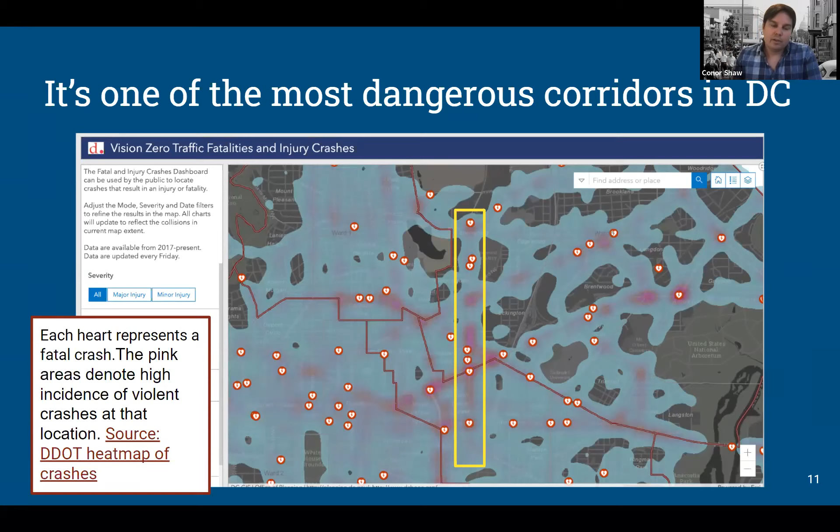Each one of those hearts represents a person whose life was cut short, and a family that lost them, and a community that lost them. We want to acknowledge the devastating impact that can have on families and communities. Sadly, this doesn't relate directly to North Capitol Street, but two days ago we lost a five-year-old, Allison Hart, to traffic violence in Brookland. We're thinking of her and her family this evening as well.

I want to focus a little bit on where these crashes are happening. If you look closer at that heat map, you'll see that a lot of the dangerous crashes on the north side of the corridor are happening at either end of the underpass. That matches the views of that witness, that people are racing, and a lot of the dangers are coming from people racing through these underpasses. On the right of the screen, you'll see the lower half of the corridor, and there also we see crashes concentrated above that south underpass, as well as at some very big intersections at New York Avenue and also at H Street.

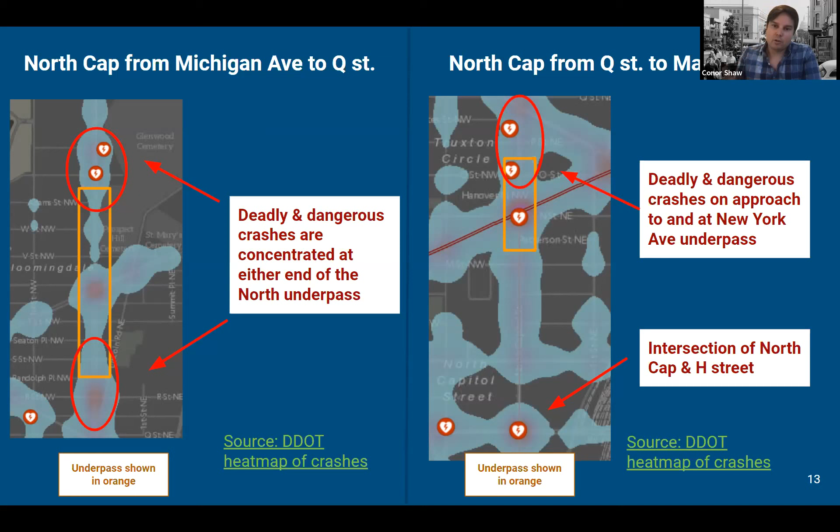We think this traffic violence is unacceptable, and making the corridor safer for everybody has to be our top priority.

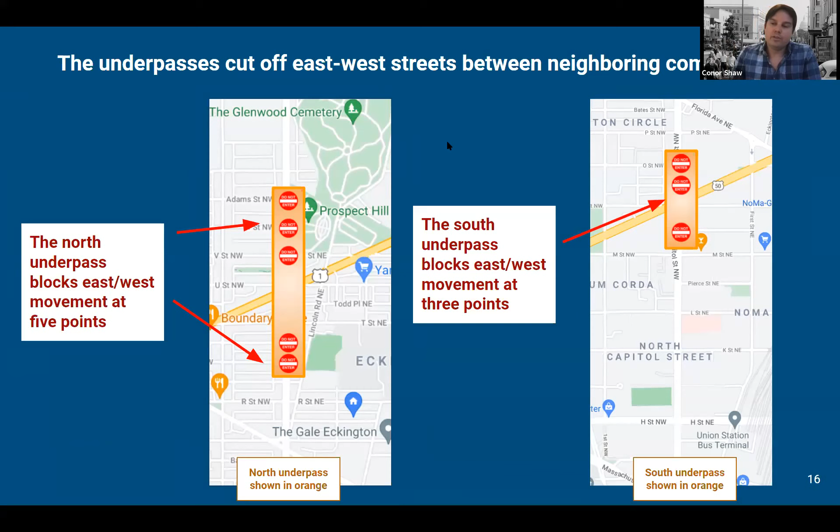Moving along, we also want to talk about how North Capitol Street divides communities. The underpasses cut off a lot of local roads that go east and west - the north underpass at five different points and the south underpass at three different points. This is what they look like at street level. We're all familiar with this. Instead of being able to cross directly, a pedestrian will have to go down the block and around. The limited number of these at-grade four-way intersections creates a lot of choke points in the corridor, funneling pedestrians, cars, and cyclists into very constrained, dangerous spaces.

We also want to talk about how the corridor is inequitable. North Capitol Street puts the needs of drivers over everyone else, even though only 31% of neighboring residents drive to work. The vast majority, about 61%, rely on other means, whether it's transit, walking, or biking. At the same time, bus service on North Capitol Street is failing. 30% of Route 80 buses are late, and the average delay of that bus is 14 minutes. The speed that buses travel along this corridor is slower than a scooter or a bicycle travels.

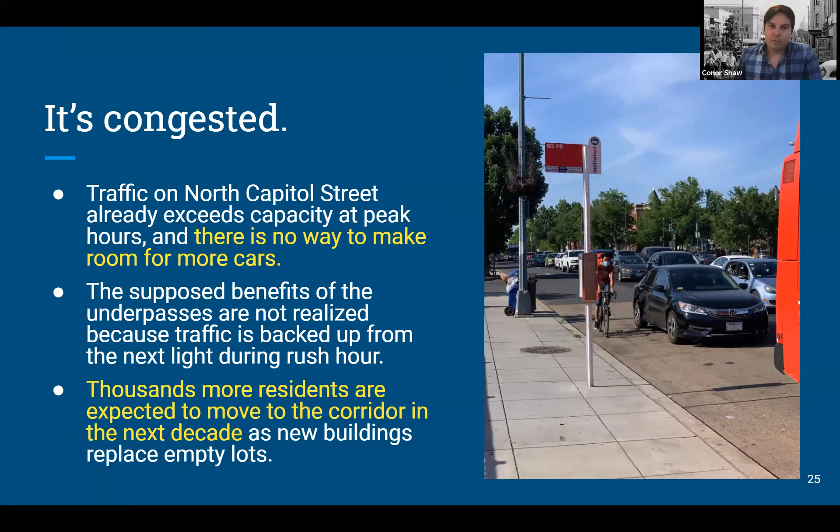We're expecting thousands more residents to move to the corridor in the next decade as more buildings come online. It's not just about congestion, though, it's about pollution. And that pollution harms residents along the corridor, especially those who live within 500 meters of North Capitol Street.

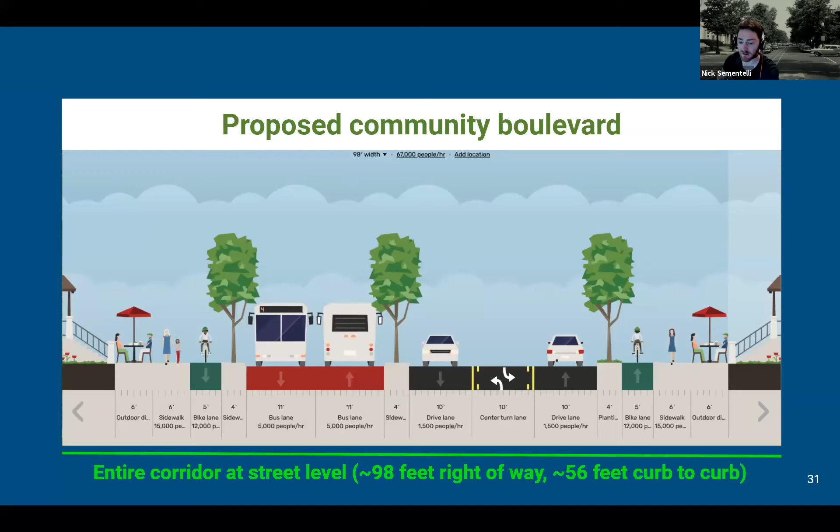The main distinction here is that to slow traffic speeds and reduce car trips on this corridor, it would require taking some drive lanes out of the picture and repurposing that space for the other modes. So we've got protected bike lanes on either side, a bus lane in a transit corridor format, and expanded sidewalk space as well. You can see the breakout here along those things. We're going to talk a bit about each of these elements and how they help.

As Conor talked about, this is really about math and geometry and efficiency. The current status of the road is only able to move so many people, and we have a lot more coming. So our only options are either to watch it get worse and worse, or to change the way we move people around. We think building the infrastructure now for the future, creating the type of street that will make it easy to use these other modes, is the key.

We also think traffic calming will be gained, as Conor said, by restoring those four-way intersections. As we talked about, the underpasses are a place where people really pick up speed, both going down and coming up. By creating much less opportunity for them to gain momentum and speed, having to interface with stop signs and lights at a regular procession, that's one of the ways you can reduce some of the most dangerous speeding behavior we see.

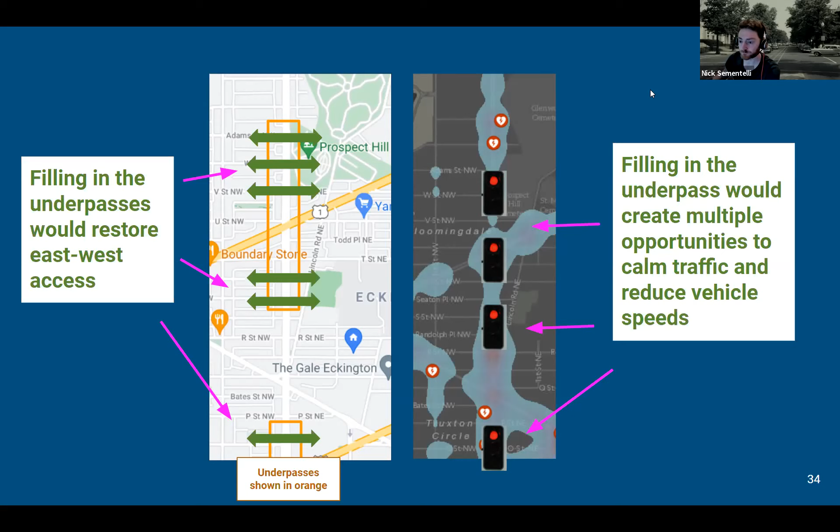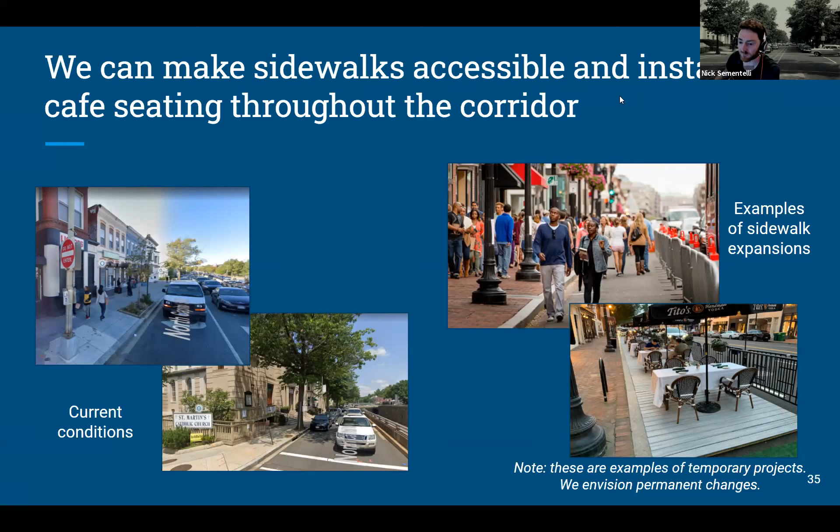We think that North Capitol businesses deserve the same kind of opportunities to really create livable spaces that people want to visit, instead of the kind of crowded right-next-to-a-highway space that we have now.

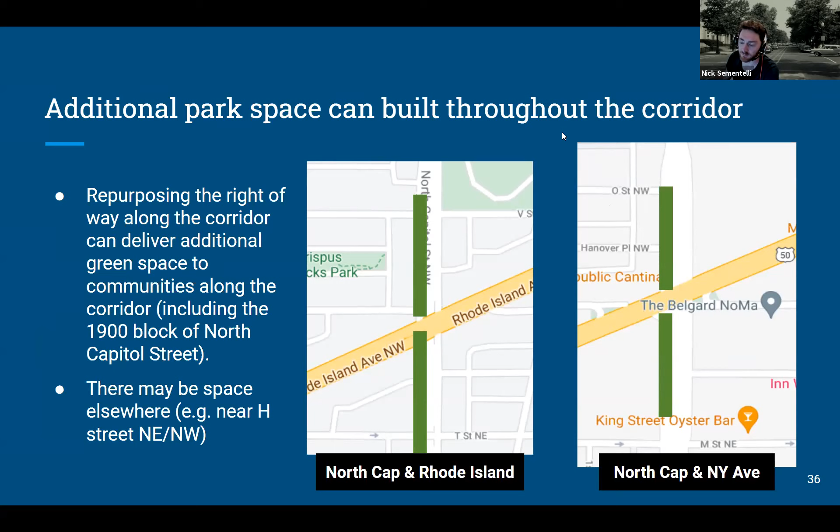The other thing that we can do with that space, particularly in the non-commercial parts, is turn it into more park space spread throughout the corridor. So you can have a lot more green space for people to enjoy as part of their daily lives and walking. And that can be on the north side, even in the areas we're talking about where the underpasses are currently, and on the south side as well, where we don't currently have as much park space or green space, really anywhere, compared to the north side in particular.

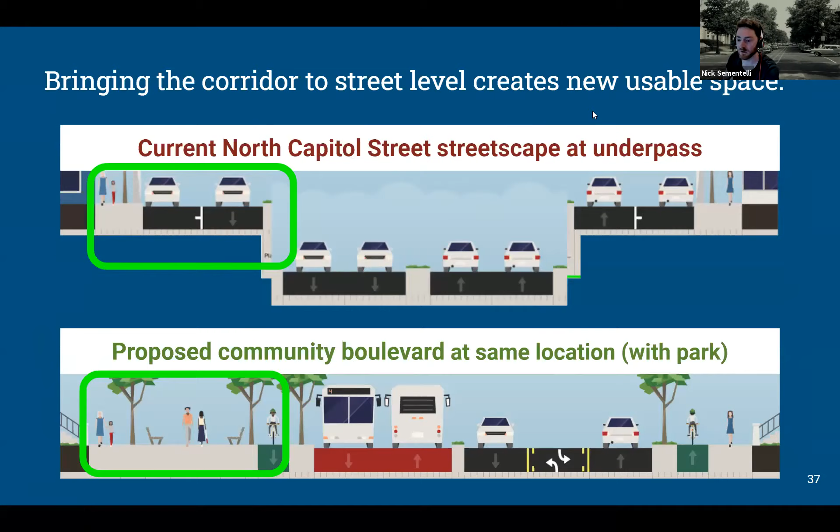The other thing that's useful about the solution is that it's really modular, as I said. When we're talking about redistributing space, we can make some choices. We think that the community really should be engaged in this process of what they want to see with that space and what the priorities are.

So, for instance, you could go even wider on your sidewalk spaces if bike lanes aren't a great fit for this corridor. And if that fourth traffic lane really makes a big difference, you could also add that back in and keep some of the other prominent things like the bus lane. So there are opportunities to work through this, and part of what we're hoping the DDOT planning process will be is really hearing from the community about which parts of this they're most excited about, to help suit everyone's needs.

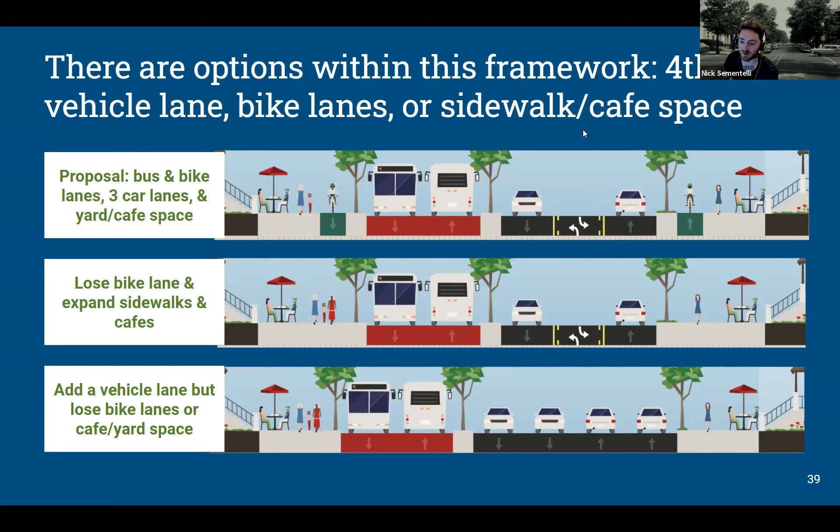So this vision is consistent with what DDOT's doing in other places in the city too. And we think it's time that Ward 5 gets some of that.

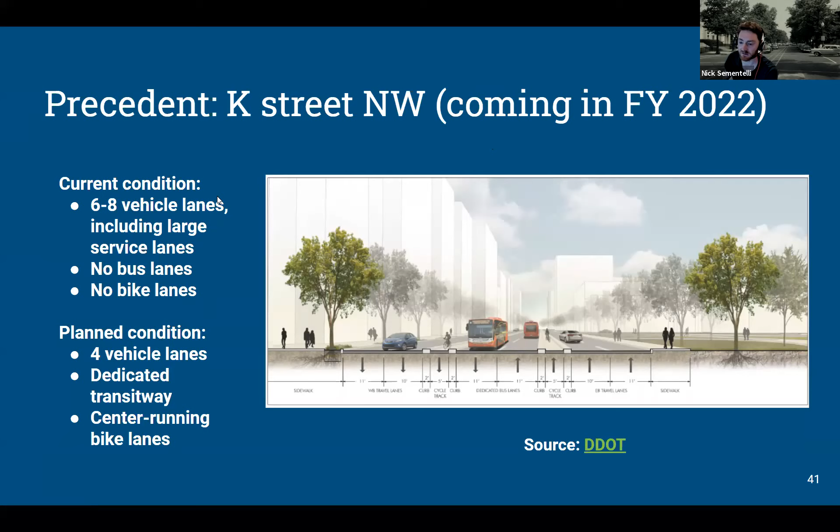So one precedent is down on K Street Northwest through the downtown area. What's currently 6 to 8 vehicle lanes with those very large service lanes, you might know if you've been there, is being turned into 4 vehicle lanes with a dedicated transit way and center-running bike lanes. That's a very big project that's been on the city's priority list for a long time, and it's a good example of reducing some of those existing drive lanes to give other modes some space.

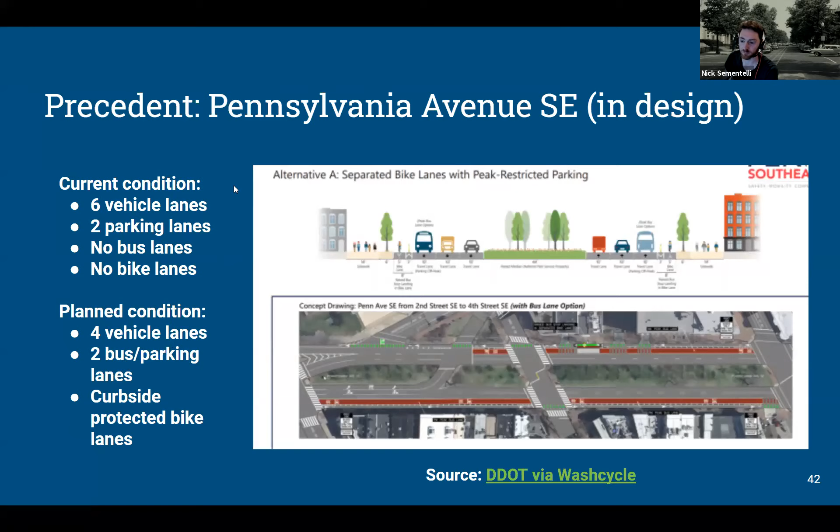Similarly, over in Pennsylvania Avenue Southeast, the Capitol Hill neighborhood, 6 vehicle lanes with 2 parking lanes are being shifted down to 4 vehicle lanes with 2 bus/parking lanes, depending on time of day, and those also have curbside protected lanes. So a similar reduction happening there for safety and livability.

So obviously we're here with two different presentations, and we think that we agree on so much, really. We are here because we're united in an understanding of some of the problems here. But Connor and I have a point of divergence where we think our solution addresses things a little bit better.

So I'm just going to lay out what we see those are, but in a friendly way to our friends over here from the Deckover community, who we're really happy are here with us today, and have some wonderful ideas that we're happy you guys are going to get to see as well.

We think the Deckover really includes a great vision to add a park to this area, but it's a little too narrow for the corridor, and it doesn't put safety at the top of what we're trying to solve, and would potentially limit our options for the future.

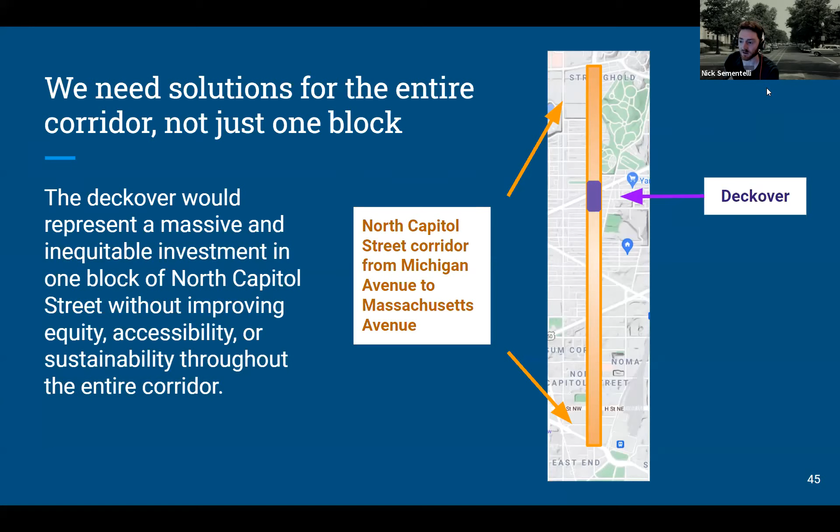In terms of the scope of the corridor, we think we're really talking about this Massachusetts to Michigan area, where, as you saw on Connor's map, the crashes are happening, where the deaths are happening, and that the Deckover helps address some blocks of that in some ways. But it doesn't really speak much to the rest of the corridor in as substantial a way as we think we can. We think it also locks in some of those unsafe conditions.

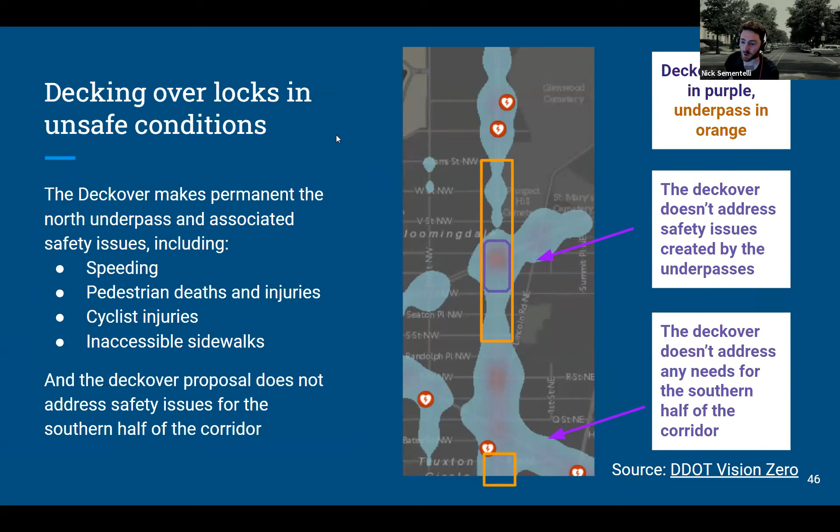We talked about why we think the underpasses really exacerbate the speeding and danger of the block, decking over on the one and leaving the other completely as is. We think this locks those conditions in, in a way where we really could be thinking bigger. We also think park space is an amazing thing we should be adding more of.

But we do think that this block of the whole corridor is not quite the place most in need of it. We know Harry Thomas Rec and Crispus Attucks are great parks. They certainly don't meet every need of everyone in the community - there's always room for more - but we think there's opportunity to look a little elsewhere in the corridor where we could bring some park space and make it even more distributed across the corridor.

The other reason we're pushing for a little bit more is that these really are moments that only come around once in a generation. The level of budget, attention, and political will - it's rare that one street's going to get changes twice in a row. So as long as we're here at the outset, it's really incumbent on us to ask for the thing that will make the biggest difference and fix all the problems together.

So our idea here is really to merge the best of both worlds. We think we can add a signature park that is very much in line with the space the Deckover is offering to bring to the community, into the community boulevard vision. And we actually think there's an amazing place for it that's already been identified in the past.

This is Lincoln Road looking southbound, Lincoln and North Cap, where those two veer off and connect together at Florida. There's already two very small pocket parks here - think of this as the place where the flea market often puts some of their wares. This space was identified in the 2013 Mid City East Livability Study by DDOT, shown as this blue space on the right, which they already recommended closing off for safety reasons - this cut-through lane, basically.

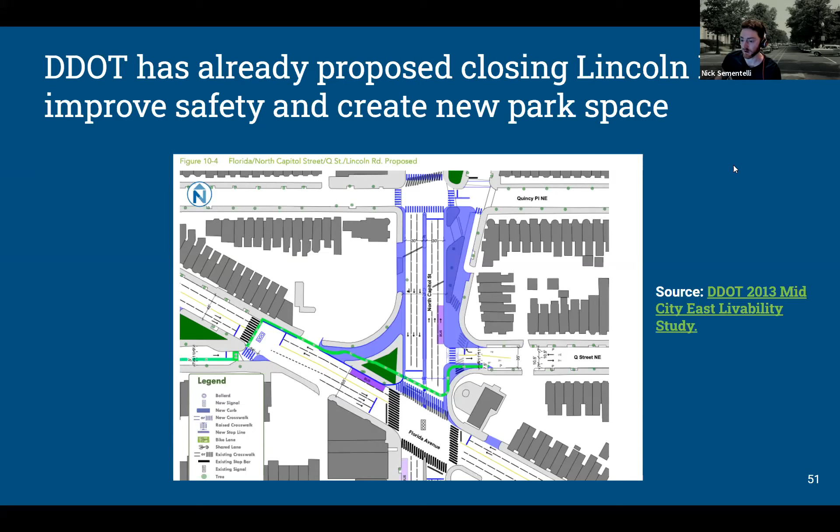In fact, more space than even DDOT identified in 2013. What we actually have here in terms of public right-of-way is a significant amount of space, because you'll notice this semicircular shape here at the right end - we've turned the map 90 degrees here. This is what used to be the old Truxton Circle, where the neighborhood gets its name from. That right-of-way actually covers all the way through the Q Street intersection, so we've got this long, semi-narrow, but actually quite wide at the bottom space that we think can be an equivalent opportunity to add a great park.

This is just some of the ideas that we've talked about in terms of segmenting the space, the same way the Deckover has done a much better job thinking through the vision of the park itself. This is a very early idea on that, and we also think there's some options for connectivity here.

The blue represents the opportunity to do something similar to what the Deckover offers, called a woonerf, where the pedestrian level, the sidewalk, and the street are basically at the same level, usually done with the same material, often brick pavers. It's the kind of thing you've seen down at the Southwest waterfront. It really communicates to drivers that this is a different kind of space, a pedestrian-first space, so they need to be slower and on unfamiliar territory.

We think we could offer similar connectivity here through Quincy and up to R, and through the alley there. But also, if the community felt really strongly, this could be entirely parked with traffic routed out the other side. That's something the community would want to talk a lot about in a proposal like this.

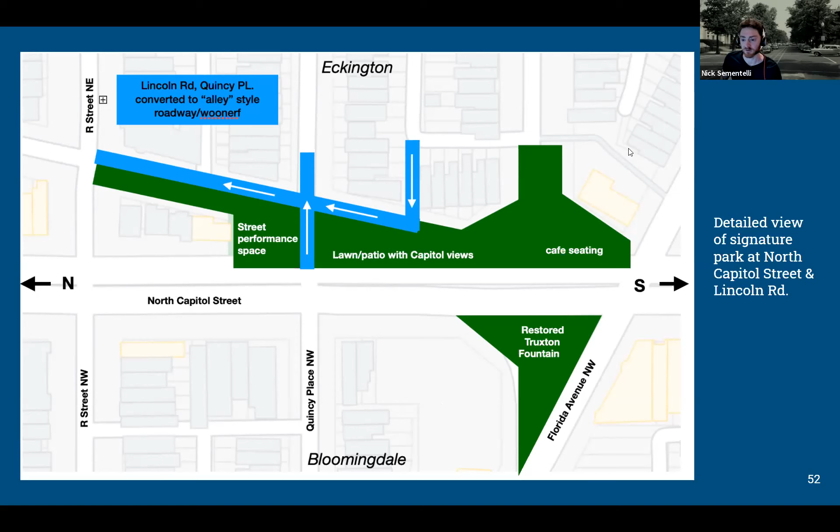In terms of total size, we think this is a real opportunity to add a very similar amount of space as what the Deckover is proposing. By an unofficial measurement, using the same scale on these maps and tools, we think we're talking in the same ballpark of 30 to 40,000 square feet for each case. So we see this as a great way to essentially add that space either way, without locking in the underpasses.

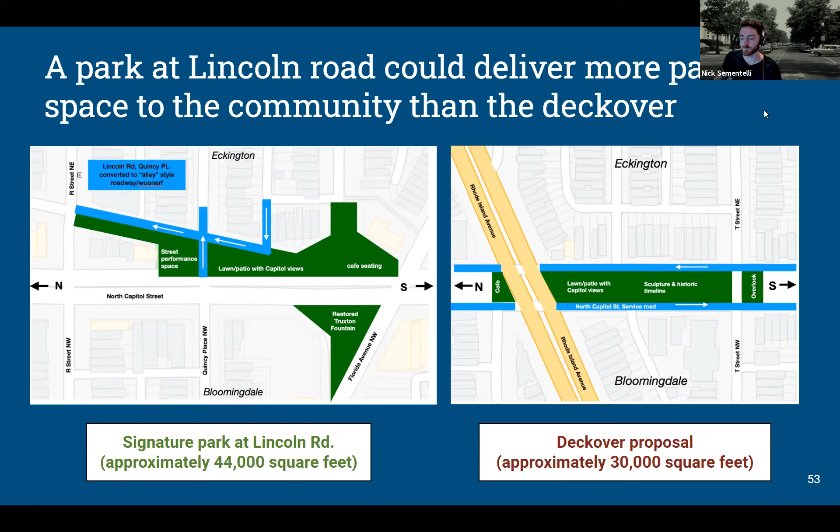The other thing you might have noticed in the slide is a mention of restoring the Truxton Circle fountain. This is something the community lost when Truxton Circle was bulldozed away. Apparently the fountain has been lying rotting away in a national park in Maryland, so it's still there—I don't know what condition it's in. This is a bit of an optimistic idea.

But I've been inspired a lot by what the Deckover folks have brought around using the park to tell the story of the neighborhoods and some of that history. I think this could be incorporated in a way that might be really special, marking this space and restoring something that was lost from the community.

So to summarize, we think Community Boulevard is the right long-term vision here for North Capitol Street. This will make the corridor safer, help reconnect the neighborhoods, improve transportation equity and sustainability, and help us add a lot more park space throughout the corridor, including that signature park, hopefully at that location. In terms of logistics, we know this is a big project and a big vision.

There's a lot of funding options that will all be part of the conversation. The first is that DC's capital budget regularly funds projects like this—the K Street project I mentioned had $116 million in the budget, and the Douglass Bridge, just completed by DDOT and opened last weekend, was a $400 million project. So the district has made big capital projects for streetscape redesign a priority in other parts of the city, and we think North Capitol is a particularly needing and deserving one.

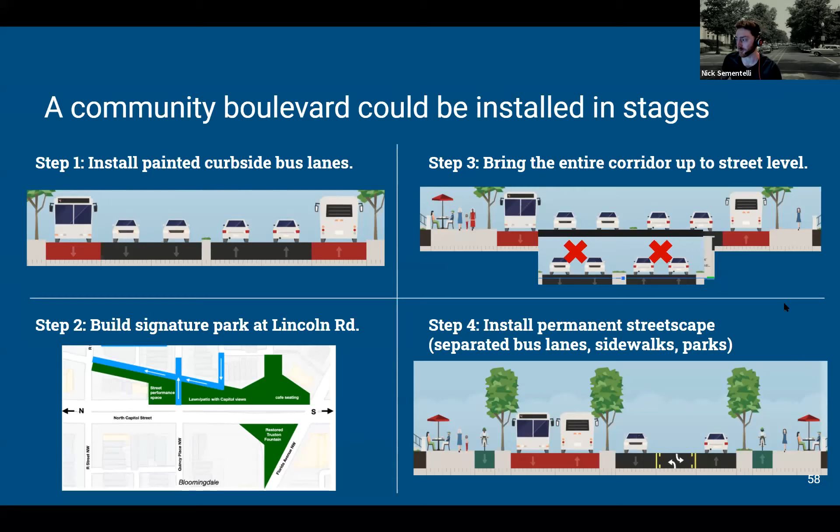Building that signature park certainly isn't dependent upon the entire thing happening right away, so there's opportunity for that to be sequenced in. And then obviously bringing the road to grade would probably be one of the larger portions of the construction, followed by installing the full streetscape redesign. We're not DDOT, we're not the planners, but our expectation is there would be some level of staging to this.

So our pitch for the proposal, going through everything we talked about, is why we think the compromise really maxes out all of the things we're discussing here, and is something we hope DDOT will be interested in engaging with. We hope you'll bring great questions and ideas to make it even better.

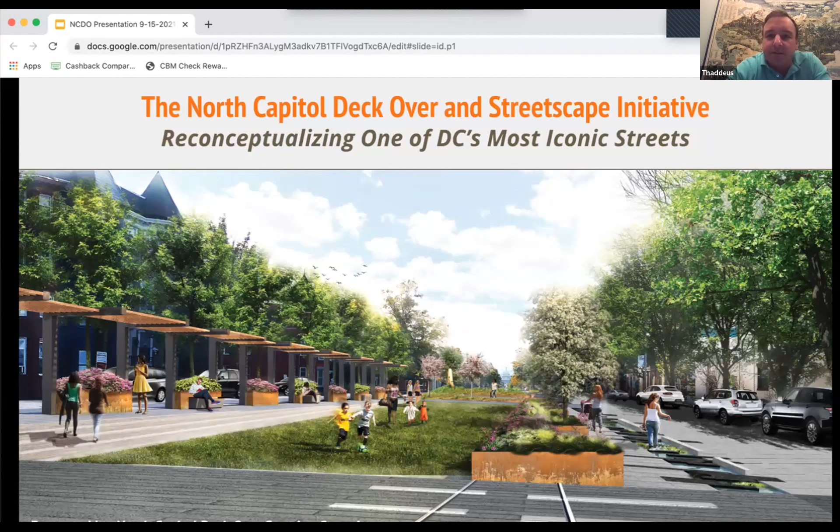Thank you to the Eckington Civic Association, as well as to Nick Sementelli and Conor Shaw, for giving us this opportunity to speak on behalf of the North Capitol Deckover and Streetscape Initiative. My name is Thaddeus Thaler, and I'm a resident of Bloomingdale—I actually live right on North Capitol, overlooking the underpass. Joining me on our panel is Mark Galvan, a resident of Eckington and vice president of the Eckington Parks and Arts Association, as well as Bloomingdale Civic Association president Teri Janine Quinn, and ANC 5E representative Bertha Holliday.

What we want to talk about here today is the alternative vision from what was just presented a moment ago, and we like to think it's the one that's been around a little bit longer. But to start off, the approach that we have for the North Capitol Deckover to create a park over the Rhode Island underpass, I know my colleagues would be appreciative if we talked a little bit about the history in a similar way that was just described earlier.

I think a good way to demonstrate that is through a video here that was presented by Vox a couple of years ago to describe the history of highways in the nation. In particular, I would like you to listen to two mentions of Washington, D.C. So without further ado, I will get this video started.

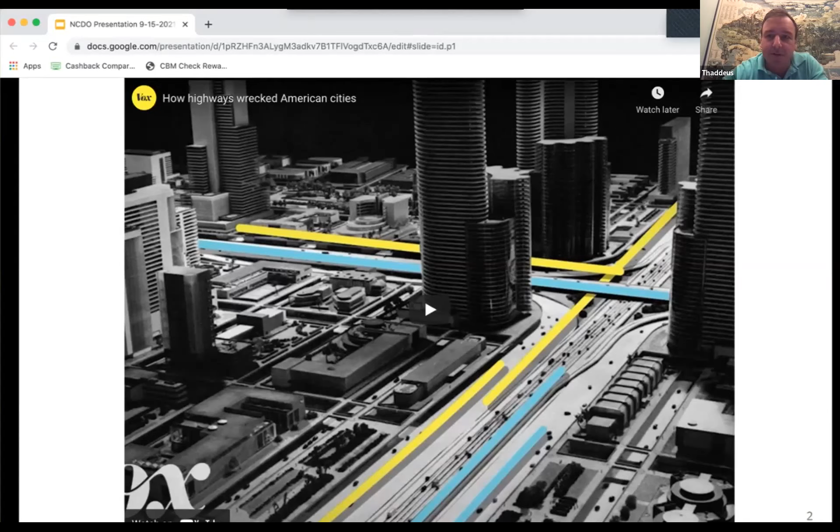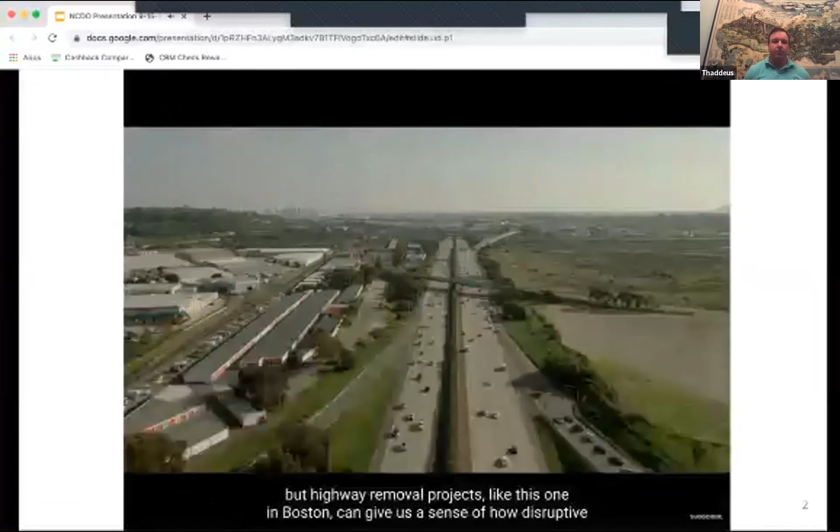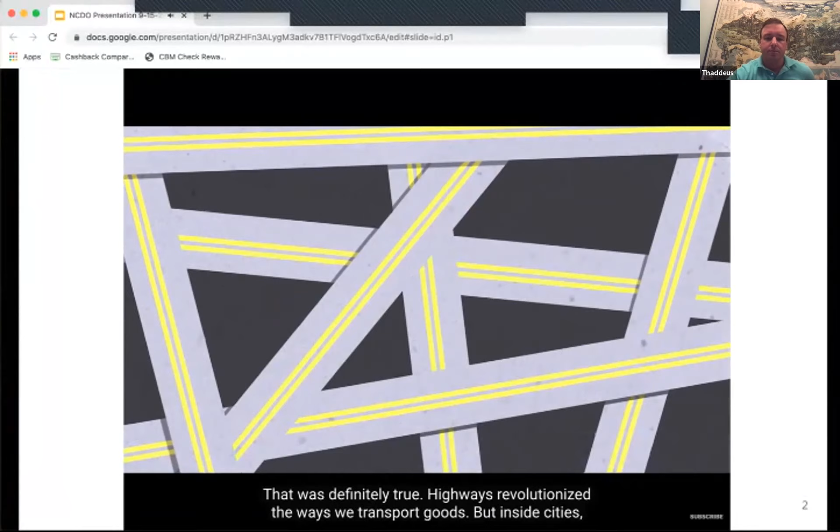It's hard to picture American cities without the highways running through their core. But highway removal projects like this one in Boston can give us a sense of how disruptive it was when the U.S. built huge highways through the cities after World War II. These new highways will have a far-reaching economic impact on the entire nation. That was definitely true. Highways revolutionized the way we transport goods. But inside cities, they demolished and isolated entire neighborhoods. They gave wealthy taxpayers a way out of the city and gave air pollution and traffic noise a way in. And they redesigned urban life around the car. Now 85% of Americans drive to work every day.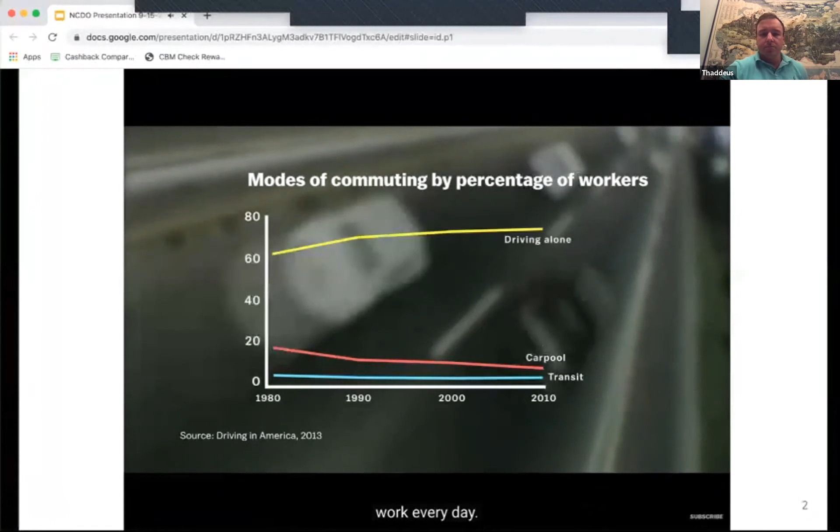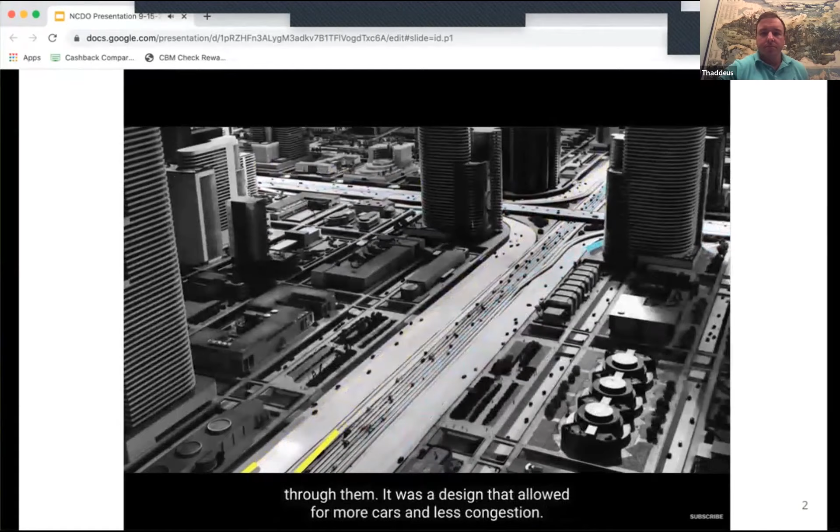So why did American cities agree to build highways that were bad for cities? It's a really interesting question, and part of it actually goes all the way back to the 1930s, when a group of auto interests, such as General Motors, AAA, formed something called the National Highway Users Conference. They began lobbying for taxes that would help fund highway construction. General Motors started to design what a new highway system could look like, and they displayed that vision at the 1939 World's Fair with Futurama, an exhibit featuring expressways that not only connected cities, but ran right through them. It was a design that allowed for more cars and less congestion. By 1955, the Department of Commerce echoed GM's vision with something called the Yellow Book. It laid out all the routes that interstates would take throughout the country under Eisenhower's Federal Highway Act of 1956, which funded the national highway system.

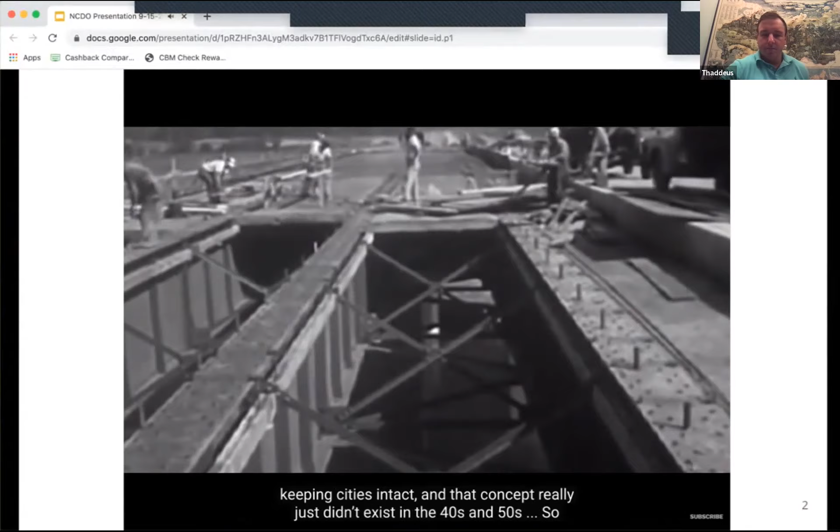A lot of it's logical. It's connecting most of the U.S.'s major cities. But the really interesting thing is you also have highways slicing right through the downtowns of many of these cities. Pretty much every major city in the country, New York, D.C., San Francisco, Philadelphia, you have major highways cutting through neighborhoods, requiring the demolition of lots of housing and other sorts of buildings. That's largely because some of the key contributors to the plan were auto industry members, developers, but no urban planners. And that's because the profession barely even existed at the time. Nowadays, there's a value placed on preserving neighborhoods, on keeping cities intact, and that concept just really didn't even exist in the 40s and 50s. When people were talking about connecting the country with highways, it seemed pretty natural just to drive highways through the center of cities as well.

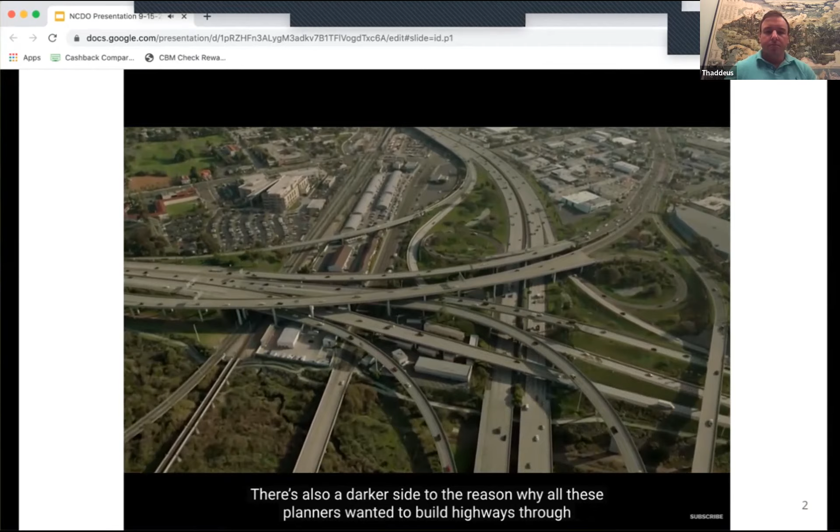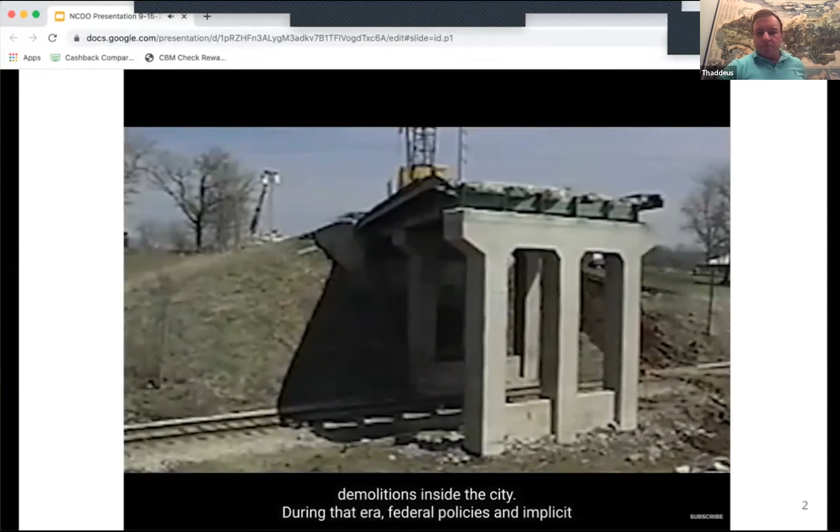Local municipalities were particularly eager to build highways under this plan because 90% of funding came from the federal government and the other 10% from states. There's also a darker side to the reason why all these planners wanted to build highways through downtowns and urban neighborhoods. Highways not only paved the way for more and more white people to move into homogeneous suburbs, they also provided cover for targeted demolitions inside the city. During that era, federal policies and implicit priorities of planners dictated that vibrant, dense downtown neighborhoods filled mostly with African-American residents, instead of being preserved under the plan, were slated as targets for removal. They were considered blight, and an easy way of getting rid of that blight was by demolishing them and paving a highway through it. Neighborhoods and streetcars were pushed aside to make way for the automobile.

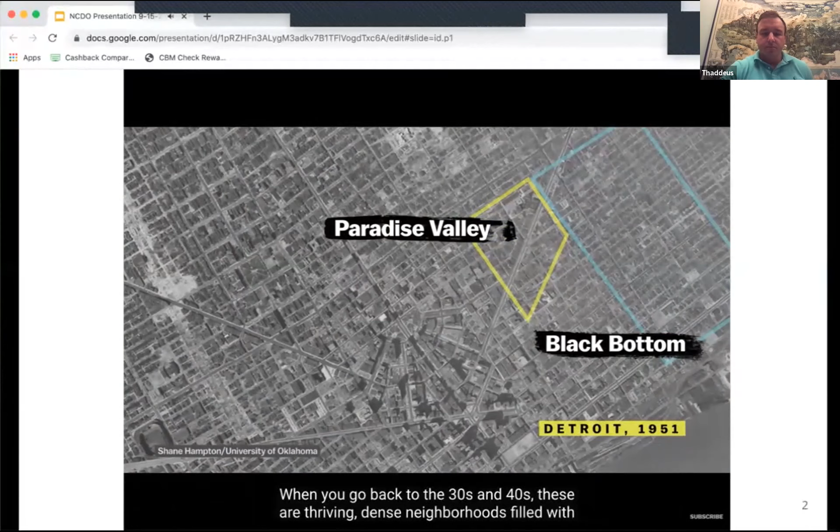Look at the neighborhoods of Black Bottom and Paradise Valley in Detroit. When you go back to the 30s and 40s, these are thriving, dense neighborhoods filled with hundreds of thousands of residents, of businesses. And if you go back today, they're mostly just empty grass plots. This wasn't just a historical accident. It became a pattern in cities across the country.

Poor and minority residents were displaced to make way for highways, and white residents used those highways to commute into the city for jobs and back home at night. The only exception is where highways were slated to go through wealthy neighborhoods—there were actually proposals to put a highway through Northwest DC and through Greenwich Village in Manhattan, but you can guess what happened there. Anywhere residents had the means to organize and protest, they were often able to stop the highways. Where residents didn't have that political capital, their neighborhoods ended up demolished, and they're highways today.

So to that vein, we wanted to talk about the history of North Capitol Street. In Georgetown, the Northwest reference made in the video, it didn't happen down Wisconsin Avenue—no, it happened on North Capitol Street. The expansion and widening of North Capitol Street finished in 1963, just a few years after the National Highway Act was passed in 1956. This was indicative of a gradual eastward movement shifting the dividing line between white and Black neighborhoods. It originally was west of First Street, moved eastward to First, and finally settled on North Capitol Street.

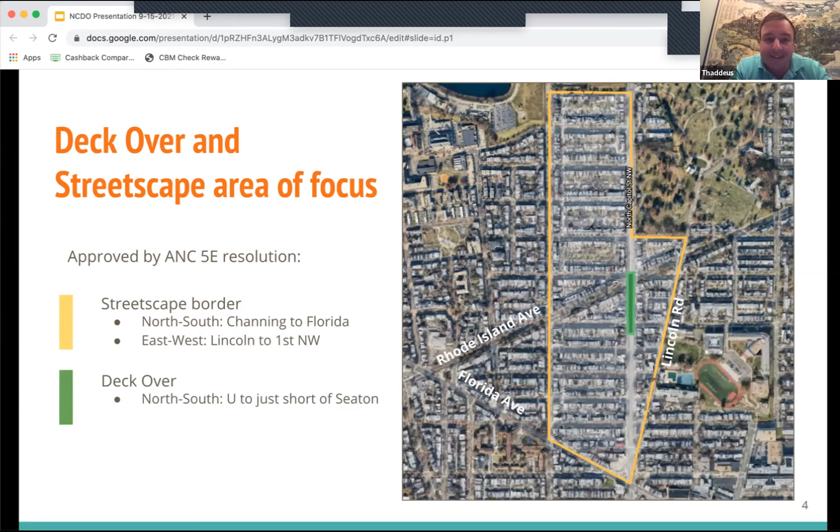The distinguishing factor between the two competing ideas—bringing North Capitol Street to grade versus providing a Deck Over—is the question of reuniting communities versus purely focusing on transit, which by and large comes from out of state, from Maryland drivers. If you ever stand over the underpass, you'll see the number of Maryland plates coming through. The importance of reconnecting communities divided by this national highway, to rectify infrastructure wrongs and create a safe place for people to cross, is how we've envisioned the Deck Over space and park overall.

On top of that, you have aspects of pollution which would be covered up. You would have noise covered up, reduced, and essentially eliminated by capping over this existing space.

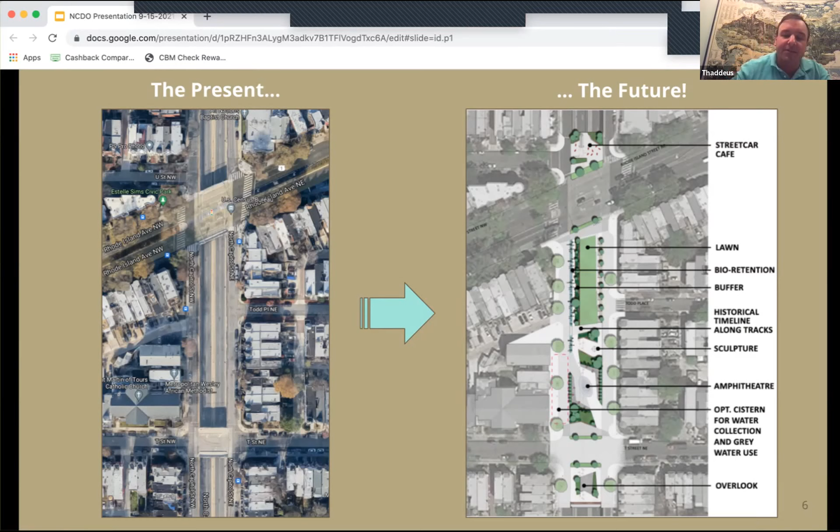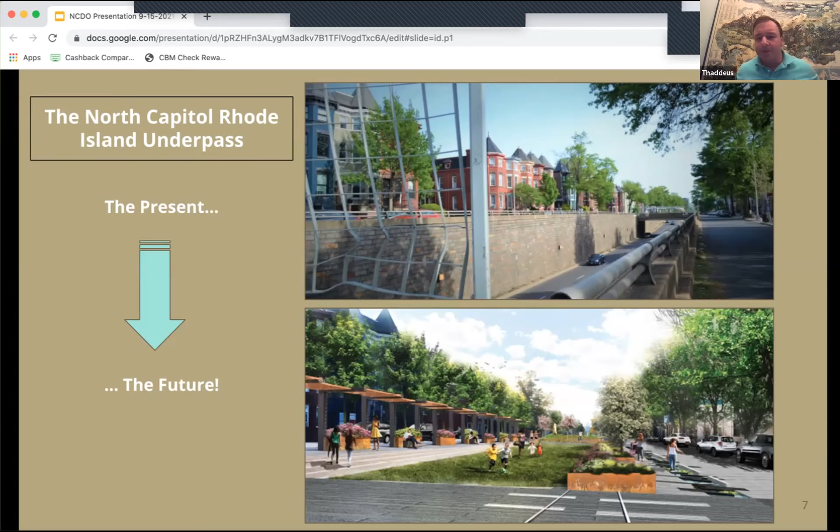Here's another viewpoint looking south from Rhode Island on the northwest side of North Capitol Street at the top, versus what could be—covering it over, providing lots of shade, additional trees, an area down the center for children to play, and curbless streets off to the side that run along St. Martin's Church. We've really upped our civic engagement this year in the post-pandemic era.

When you talk about traffic coming through, this is my every morning when I look out my window. This is what I see, this is what I hear, this is what I smell. And not only myself, but another North Capitol Deckover Steering Committee member, Sandrine Bukersh, who lives in Eckington on that side of North Capitol.

So this is what would be covered up essentially. Imagine not having that noise, not having that pollution emanating up, as opposed to having it at grade level, basically bringing all this right up to surface level.

This gives you another view of what could be. The way that this had been presented to us was the possibility of having several different areas. You could have a rest area, play area, gather area, vista area. It's very typical of urban planning to lay out parks in this manner.

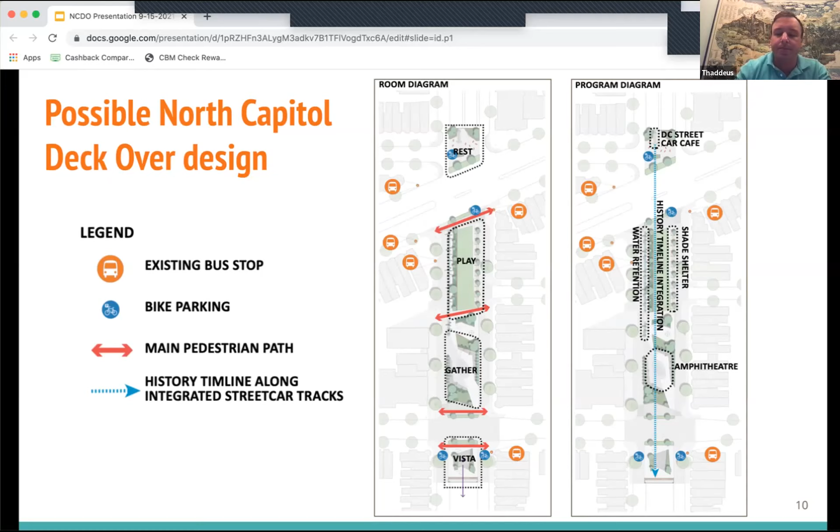When we talk about safety, something important to consider is a study done in 2017 by public health specialists from Columbia University and the French School of Public Health, published in the American Journal of Public Health. They described, using scientific Monte Carlo economic simulations, how savings were realized in 84% of those simulations.

Ultimately, in a rapidly urbanizing world, reclaiming green space through deck parks can bring health benefits alongside economic savings over the long term. They produce exceptional value when implemented over below-grade infrastructure.

So when you're making assertions about things like this, it's important to look at the research that's been done. Sure, you can make assertions, but what is the science to back it up? What have the actual subject matter experts said? None of us on the North Capitol Deckover Committee assume that we ourselves are urban planners or transportation safety specialists, so that's why we rely on outside sources like this.

For example, when we talk about traffic lights that could occur if you were to bring the underpass back up to grade, as we saw in the previous presentation, it was described that traffic lights are a traffic calming and safety measure, when actually that's not the case.

According to the US Federal Highway Administration, the New York City Department of Transportation, and a professor at the University of Utah—actual authorities on traffic calming—traffic lights and stop signs really aren't designed to be speed control. It's all about traffic flow and efficiency, and actually it ends up being counterproductive. It's more about speed bumps, speed limit signs, and traffic enforcement, because drivers end up accelerating to try to get through the signal before it turns red.

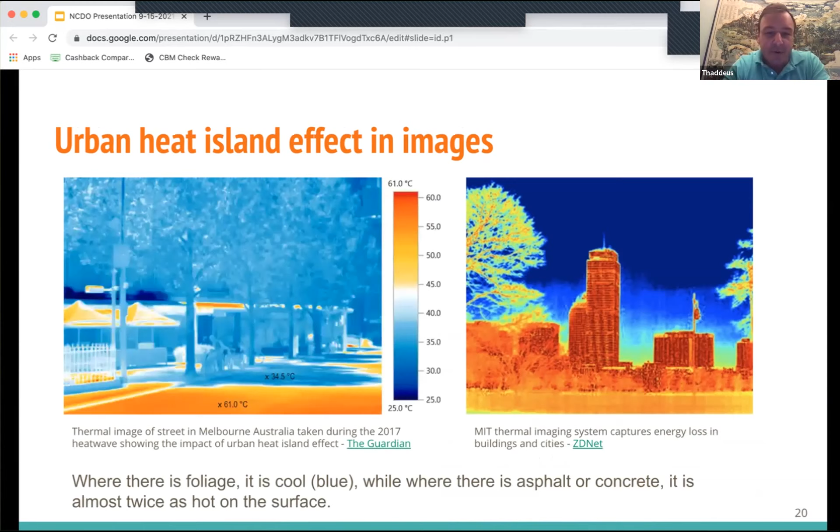You can see this distinction here. When you see the blue, that's where foliage is. Where you see the orange, that's where concrete and asphalt is. So there are a lot of different strategies that can be used to reduce urban heat, rain runoff, promote quality of life, shading, surface water, and cool paving.

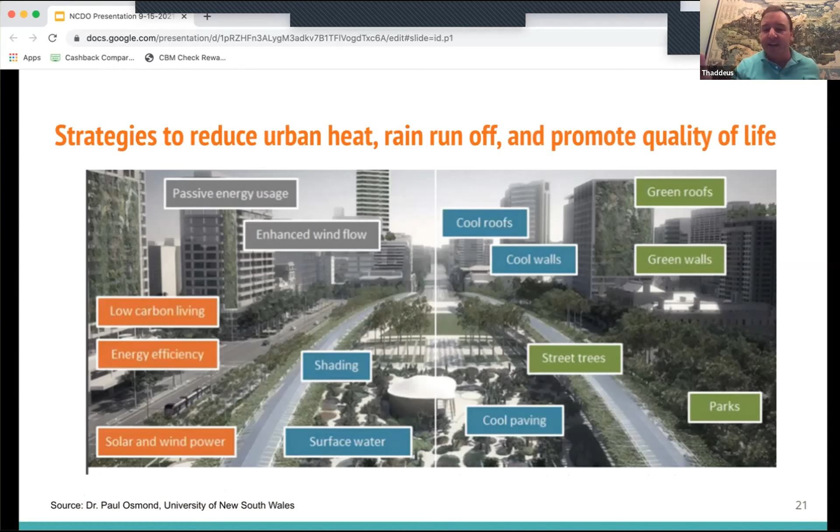And when we think about that, that's exactly what the Deckover would be doing. There are so many opportunities, from bioretention to a cistern for water collection and gray water use. Just a lot of opportunities to go in the direction the world is going, as we recently rejoined the Paris Accords, to improve the environment.

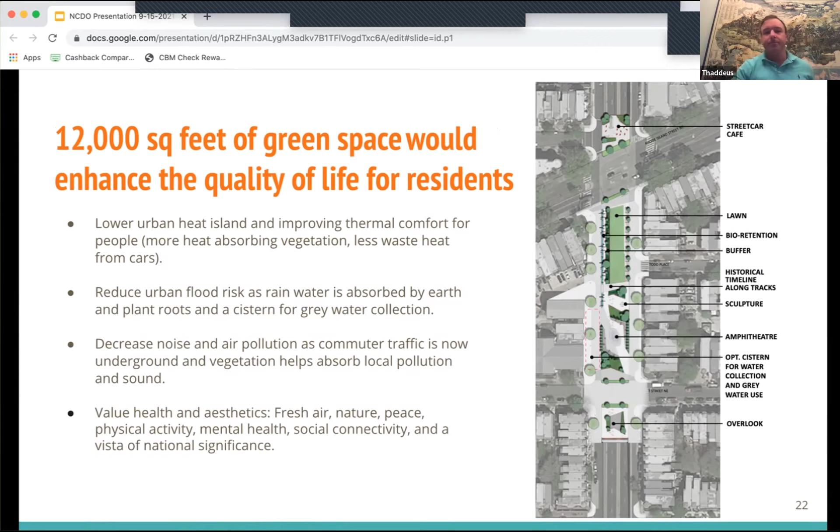And yes, we do concede that there are a number of parks around here, but something that's important is to have this connectivity of connected networks of cool green areas. You could move swiftly from Crispus Attucks to the Deckover, on down the line, Harry Thomas, and all the way down to Tanner Park as well.

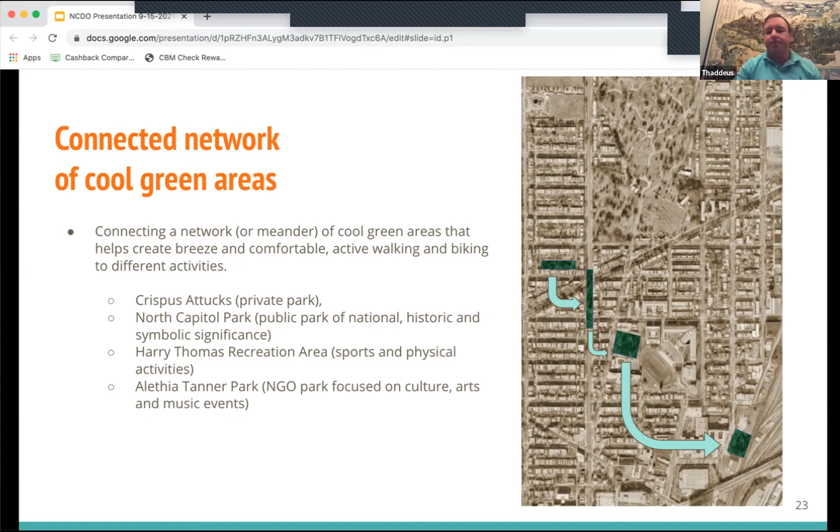And this isn't a flash in the pan idea. This has been around for about 40 years, since the first one was developed in Seattle and in Phoenix, Arizona. The importance of this is that you're able to address urban inequalities and inefficiencies while putting large volumes of highway traffic underground.

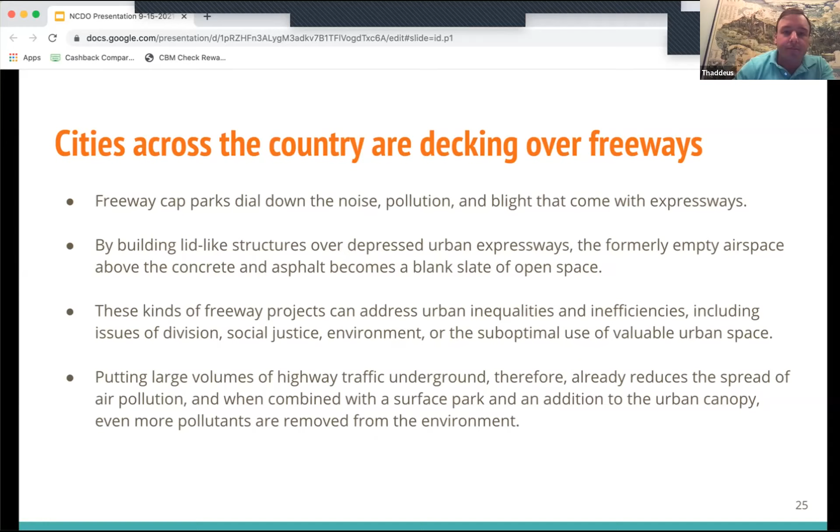As I said, they're happening all over the country. For example, in Tulsa, Oklahoma, state senator Kevin Matthews, who founded and chaired the Tulsa Race Riot Centennial Commission, talks about how a park can draw people, and where people are drawn there in closer proximity to things that will educate them. That harkens to the history component we're talking about with the Deckover.

In North Vancouver, another 2-block long deck over the freeway creates a destination public park, with both the east and west sides connected by a pedestrian overpass. We think this idea of a shared communal space where people can freely walk across, instead of having to walk across 6-8 lanes of traffic, including bike lanes, where you have to wait for a bike to cross, and bus lanes, where you have to wait for a bus to cross.

So how does that work with the actual flow of pedestrians, and the timing and movement when someone is turning onto Seton, turning onto T, et cetera, from a boulevard? What sorts of difficulties arise as you increase intersections, which are prone to accidents?

In Oak Cliff, Texas, the Southern Gateway Deck Park, it makes sense that we're going to get green space where there would otherwise be noise pollution and high-speed traffic, seen very much as a positive.

Even going back to 2008, the city of New York took a look at an inventory of decking opportunities over transportation properties. They found 83 possible areas. Yes, some of them were over train tracks, but a good number were also over highways, for example the BQE, the Brooklyn Queens Expressway. They looked at decking over the below-grade highways to stitch neighborhoods back together and create green infrastructure.

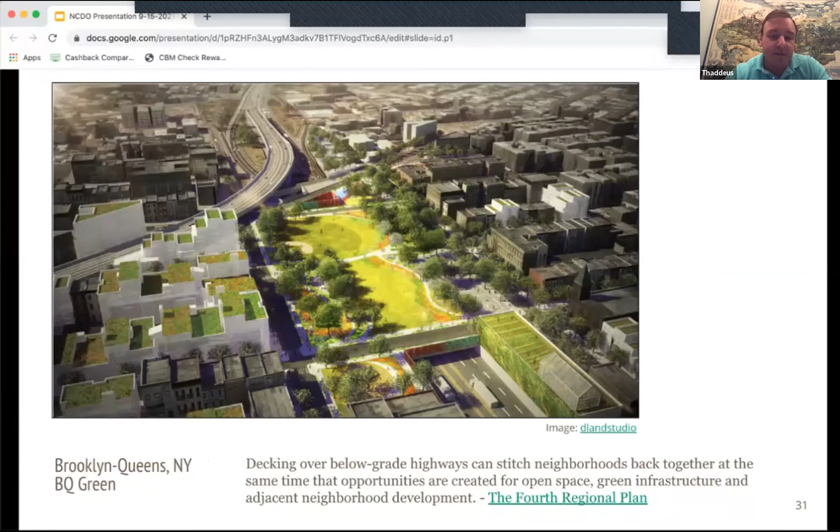I alluded earlier to the one in Dallas, which has been around for a while. They've gotten the chance, as Bobby Abtahi, president of the Dallas Park and Recreation Board, says, it's kind of turned into a public square. It's really turned into a place where you see anyone and everyone. That's the distinguishing quality of being able to have a Deckover park. You bring a place where people come together, where you reunite communities. And as we hear about reconnecting communities from the Biden administration, that's the direction we're going with a Deckover park.

St. Louis has done it as well. They actually considered bringing the Boulevard up to grade, but decided it wouldn't improve pedestrian or bike access as well as the park over the highway does. That was over I-70, and it's been very successful there as part of the National Park Service.

But it's not only the United States. Germany has been at the forefront of this, and not only the Germans are recognizing it, but the Aussies are too. The Germans are putting a higher value on green space because they have higher densities and less room to expand. Sounds like DC - we have higher densities, we have less room to expand. So what do they do? They put a higher value on green space in the way that DC has been.

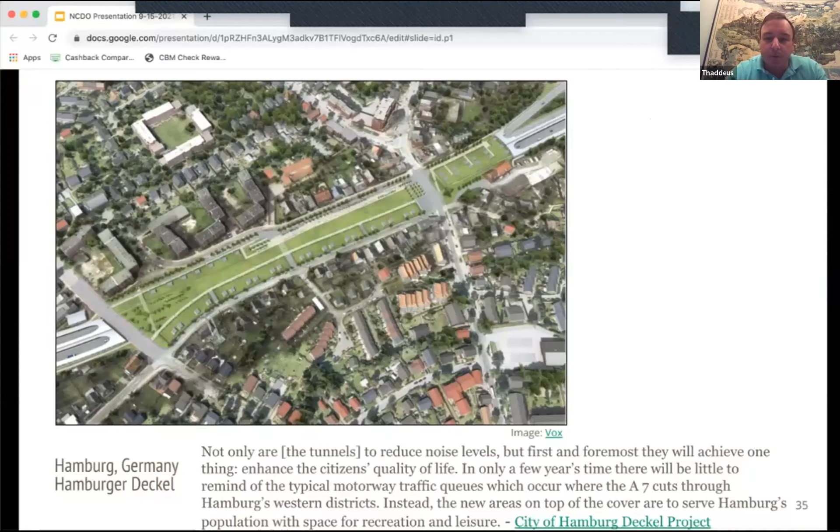A good example of this is in Hamburg, and they had a very specific focus when it comes to the one in Hamburg based on noise reduction. The importance of this will be borne out in this next video, which I'm going to mute and read the subtext, because they're speaking in German, and I know it's difficult to just sit there and read subtitles on a screen. So bear with me here. But before we get to that, I wanted to mention this quote from the lead engineer on the Hamburg Deckel, or Deckover, project: Tunnels that completely enclose a road space can reduce noise immission - and that's not a typo, this is the effect of immission - in the neighboring residential areas to practically zero. The sound waves emitted by vehicles cannot penetrate solid concrete walls and soil backfill.

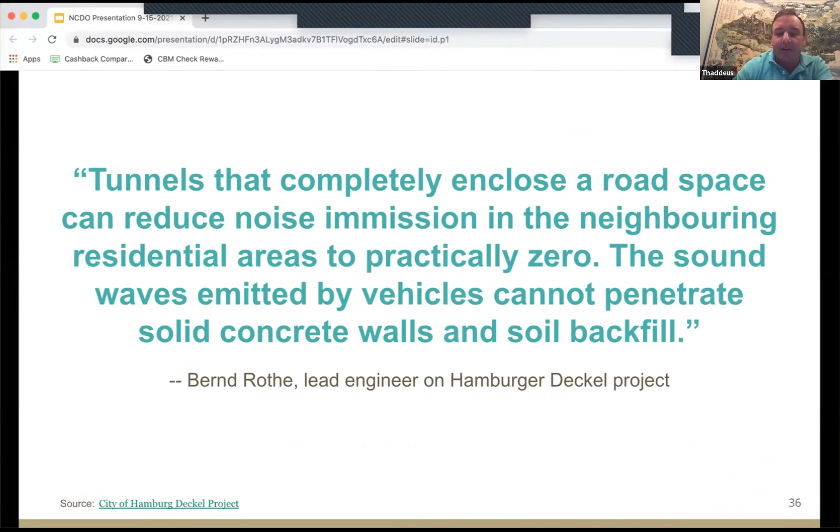Okay, so get your listening ears on. I'm going to try to read this in the most mellifluous and artistic voice I can.

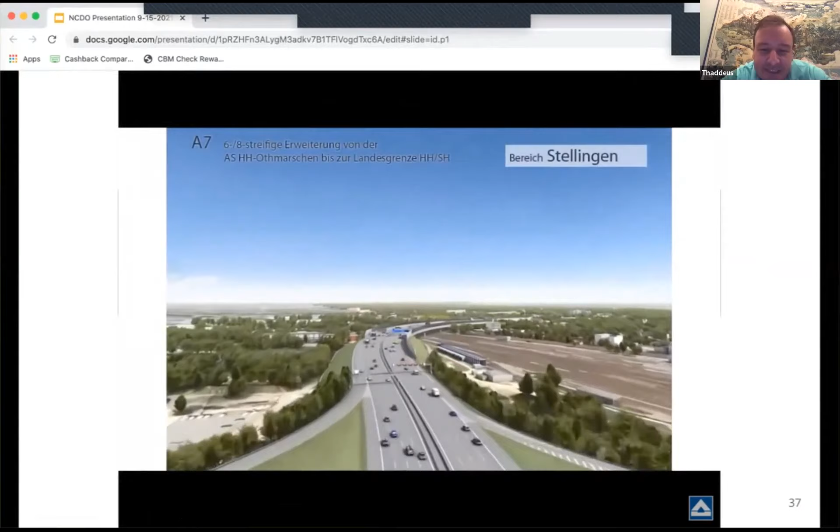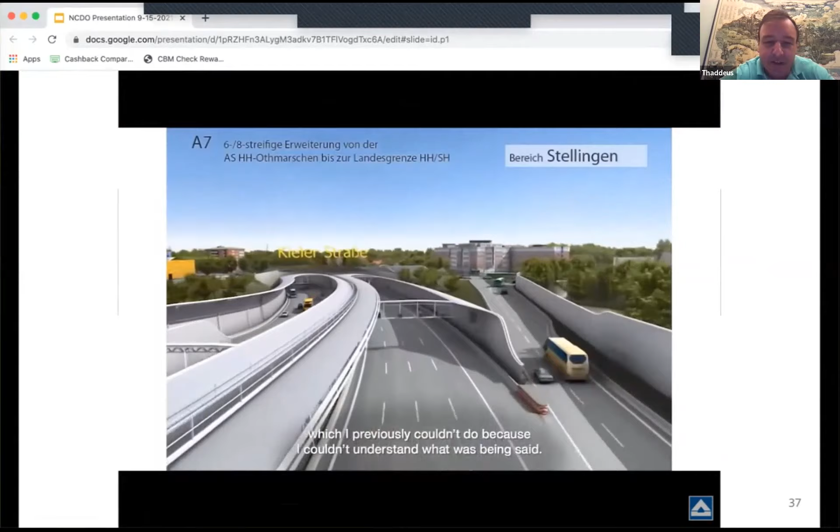For the first time since 10 years, I can now once again sleep with the window open and enjoy my nighttime peace. In summer, I'm better able to use my small oasis, the balcony, where I can sit and watch films on my laptop, which I previously couldn't do because I couldn't understand what was being said. I can listen to music without turning the sound up to full volume. I am now certainly a lot happier than before with my living situation. I definitely believe that it's increased in value. We also talked about this with the neighbors. Yes, precisely, because it is simply quieter. Since a month, the hens have been regularly laying eggs, but not yet all of them. My neighbors say it's like a wellness oasis for them. Hence, after the installation of the cover, you no longer hear any noise. It's really quiet. Helicopters no longer circle above when the highway is gridlocked. That is really great.

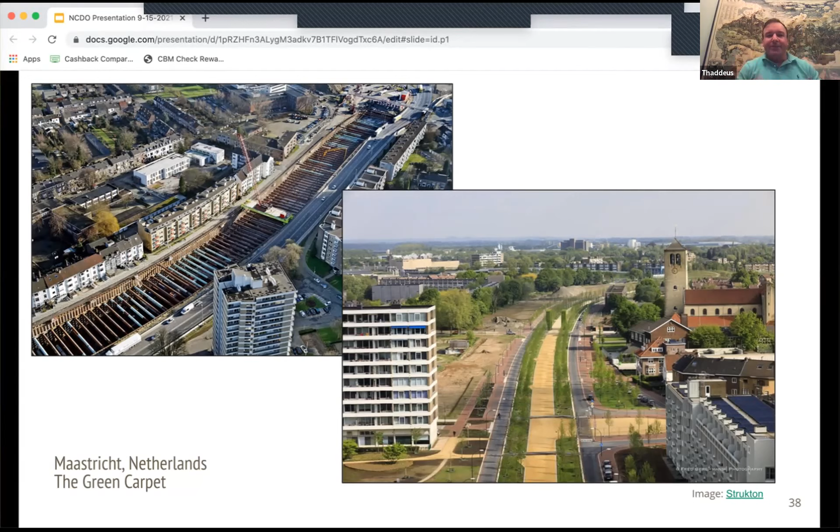Another example is in Maastricht, in the Netherlands. On the left side, you can see what those girders would look like in the creation of a Deckover project, and in the lower right picture, you see what the end result is. This one's particularly interesting because they ended up doing a double-decker version of an underpass to allow international vehicles on one level, and regional vehicles on another level, since it is an international highway.

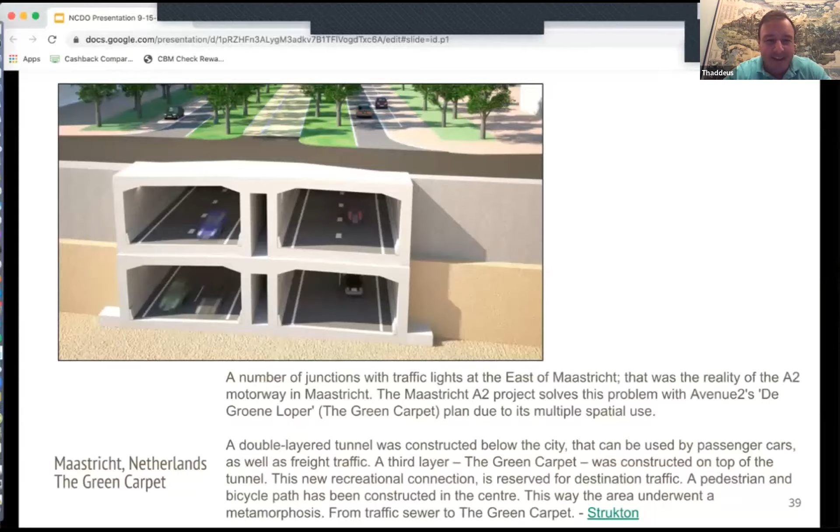And this video I will play with sound. This is about that particular Deckover in Maastricht.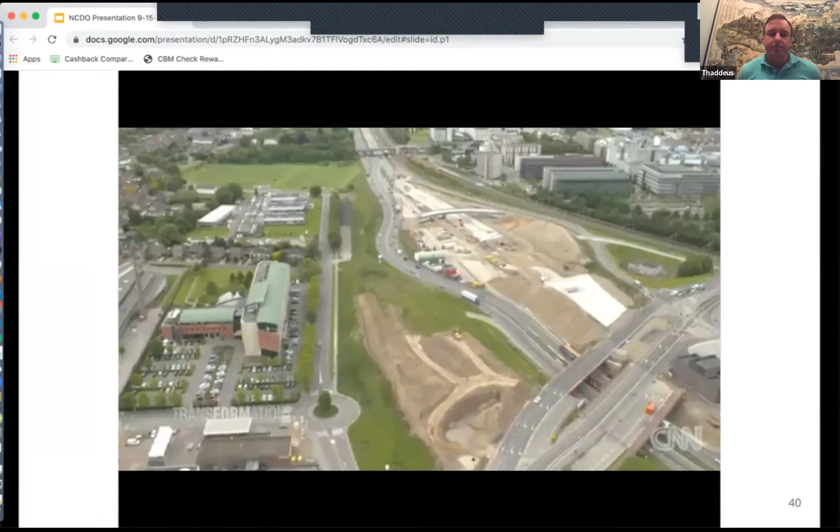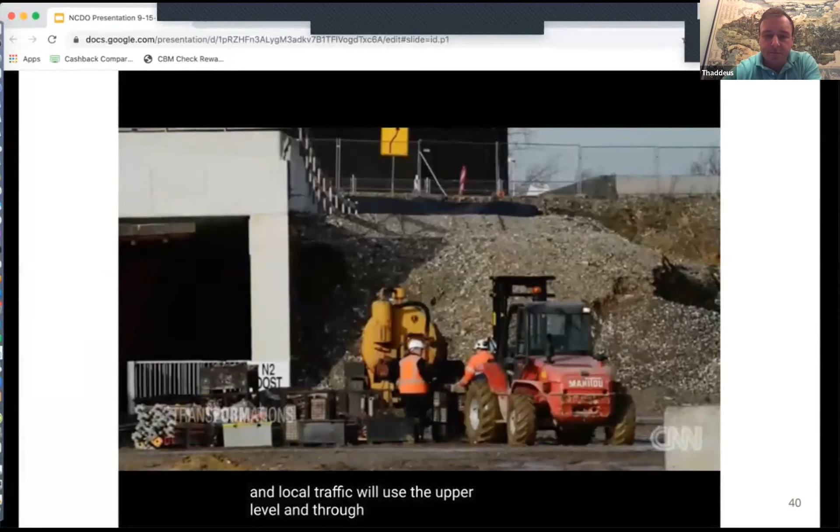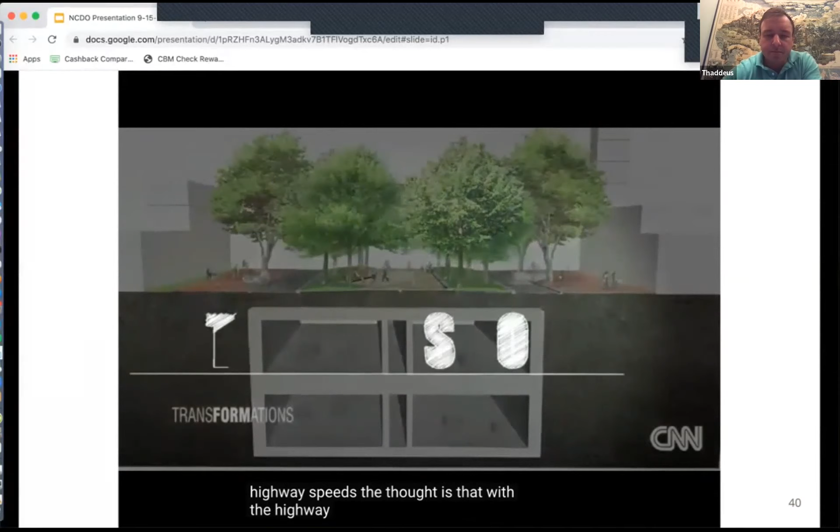The A2, a highway helping to connect the Netherlands with its neighbors, allows a free flow of traffic between countries, except for one major spot, Maastricht. Here, the stream of cars hits a bottleneck, facing a 50-kilometer speed limit and a series of unwelcome traffic lights. You see the highway running to the heart of the city in a residential area, and that's very bad because there's a lot of traffic on the highway and thousands of children to go to school and pass a highway in the middle of the city. It's crazy. So the city hatched a plan to help bring some sanity to the chaos. He came up with this plan, a double stack tunnel, which gives even more capacity for the traffic than any forecast predicted. You can build it in a very small area, which gives more opportunity for real estate development on top. Around 80% of the traffic flow will be redirected underground to the 2.3-kilometer double-decker tunnel. Regional and local traffic will use the upper level, and through traffic will use the lower one. It will allow vehicles to travel 80 to 100 kilometers per hour, keeping up with highway speeds. The thought is that with the highway hidden below, new opportunities for life above will emerge. The nice thing about our plan is that we not only make a solution for the traffic, for the cars, but that we make a better Maastricht East, that we connect the neighborhoods, and that we make it attractive again. What will be known as the green.

So that gives you a little bit of a sense of what this space looks like.

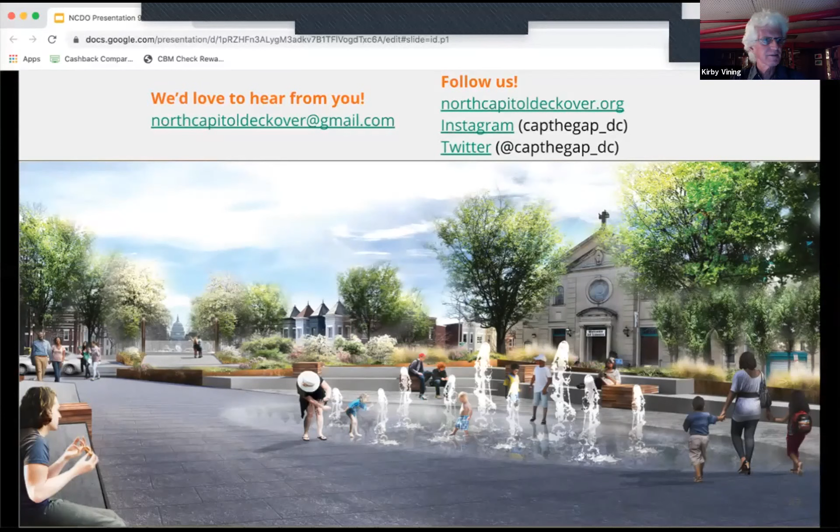Those of you who can see the Q&A, I think I should go through these, out of fairness to the people who entered them, in chronological order. Some of these I'd like to offer to both presenter groups, although it may be obvious that some of these questions and comments address one or the other.

The first one is 727: Can you speak to how to increase Americans with Disability Act compliance along the entire corridor in terms of sidewalk width and curb cutouts? I think I'd like to hear Nick or Connor address that. This was a question posed during your presentation, but if you've got anything to say, and then I'll see if the Deckover folks have anything on that.

Sure, and thank you for the question, Kaya. We think pedestrian inaccessibility is one of the major problems on the corridor. Our plan, by taking some space currently used for drivers and giving that to pedestrians, to give them accessible, wider sidewalks all the way from Massachusetts Avenue to Michigan Avenue, is a real solution and would allow for ADA compliance. Along with that, any new installation, we'd want to see crosswalks that are ADA compliant and have appropriate rumble strips on the ground, and also the speaking crosswalk terminals that you see in newer intersections throughout the city.